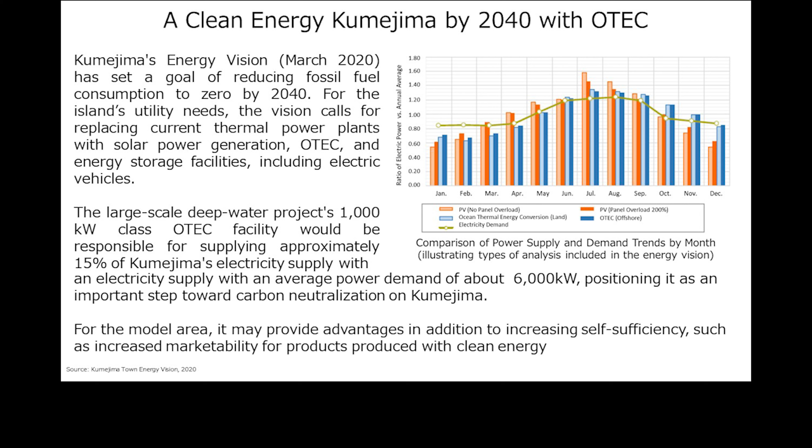As you can see in the graph on the right, the types of analysis included in this vision also consider OTEC. For the model area, OTEC may provide advantages in addition to increasing self-sufficiency, such as increased marketability for products produced with clean energy.

As a step towards increasing clean energy on the island, which is currently about 5%, and has been inhibited by the islanded grid capacity for intermittent energy sources, Kumejima Town has applied for a project which will enable installation of solar photovoltaic panels and storage batteries at the island's two junior high schools. The dramatic decrease in battery cost has provided an opportunity for the island to increase clean energy while limiting the disruptive element to the local grid.

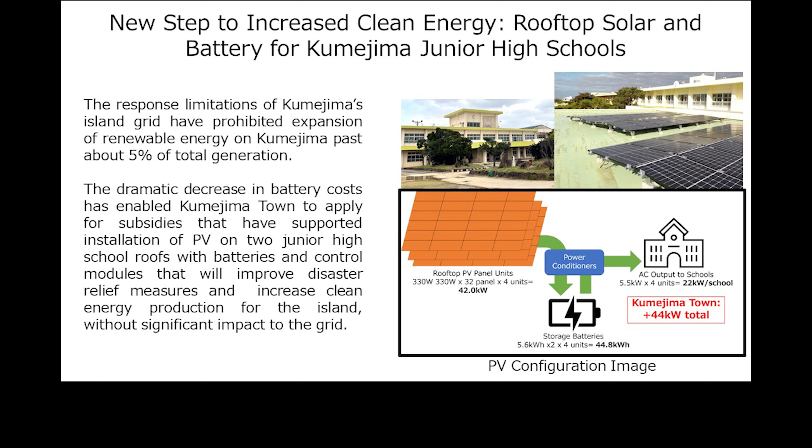The project plan calls for 42 kilowatts of panels, with 44.8 kilowatt hours of storage. The setup will also improve disaster response by providing small-scale power during outages or disaster situations. This project will bring a total of 44 kilowatts of renewable energy to Kumejima Town.

To provide a better understanding of why Kumejima is developing a model area, we would like to provide background on the current situation in Japan and Kumejima. Currently in Japan, there are 15 sites utilizing deep ocean water, or DOW, from Hokkaido in the north to Kumejima in the south. Each facility has its own focus, but overall, Japan has expertise in utilizing many aspects of the DOW resource.

DOW is water found below 200 meters, a depth below where sunlight permeates. This, as well as other ocean mechanics, provide DOW with properties different from surface seawater, namely low temperature, such as about 4 degrees Celsius, colder than some refrigerators; cleanliness, very little bacteria can survive cold temperatures, and the natural thermocline helps keep human pollution away; and nutrients. Naturally occurring nutrients are normally consumed by plankton in the surface area, but remain in the deep water. The nutrients can be used like fertilizer in aquaculture.

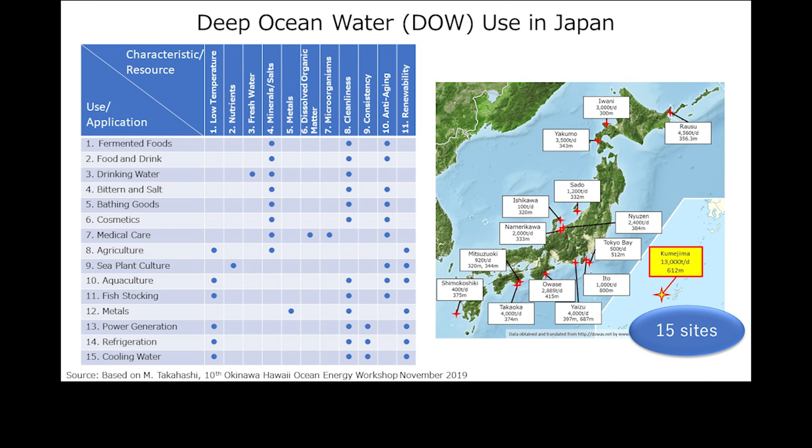Okinawa's Deep Ocean Water Research Center, ODRC, is located on Kumejima, and since 2000 has supplied up to 13,000 tons per day of surface and deep water for internal research and for use by private companies. The center was developed with a primary focus on fishery, with an intake depth of 612 meters for deep water and 15 meters for surface. The ODRC develops technologies based on DOW properties to support industrial growth. A separate department in Okinawa Prefecture's government also established the Okinawa OTEC Demonstration Facility in 2013.

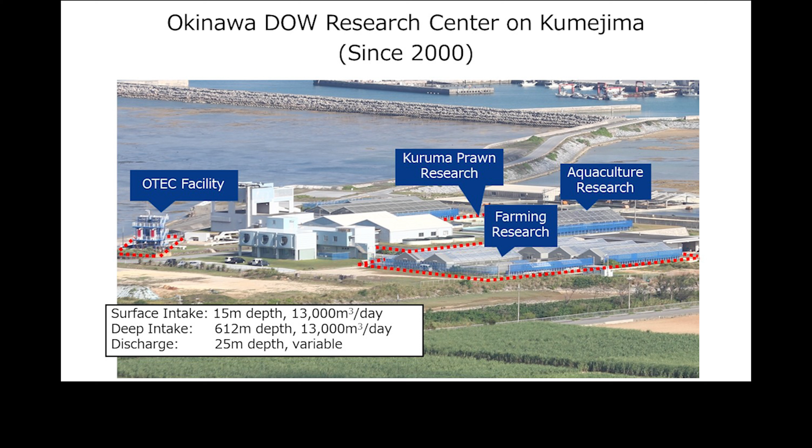In Kumejima, the majority of water is used by fishery, specifically sea grapes and kuruma prawns. Prawns are developed at a hatchery before grow out in large-scale ponds. In Kumejima, these prawns are highly prized, but were originally wild-caught. However, the trend, which is reflected in other industries, is towards farmed prawns. Deep ocean water provides a resource for stabilizing supply, improved profitability, and reduced risk.

In particular, the hatchery on Kumejima supports farms throughout the prefecture, enabling a stable and important industry for the entire prefecture. On Kumejima, local companies buy water from the ODRC and use it as a resource to create their products. As with the overall trend, the largest industrial use is for kuruma prawns, which with sea grapes now have the largest market share in Japan.

In addition, the local cosmetics company Point Pure continues to grow as it produces its own brand and OEM cosmetics such as shampoos, moisturizers, and cleansers. Together, these industries provide roughly 2.5 billion yen in annual revenue, supporting more than 300 jobs and industries not just on the island, but throughout Okinawa. In addition to producing products for local consumption, it also allows for exports.

To give an idea of scale, Kumejima's total agriculture output is about 2 billion yen per year, so DOW industries have become one of the largest single industries for the island. Here's a quick look at some of the deep-sea water industries on Kumejima.

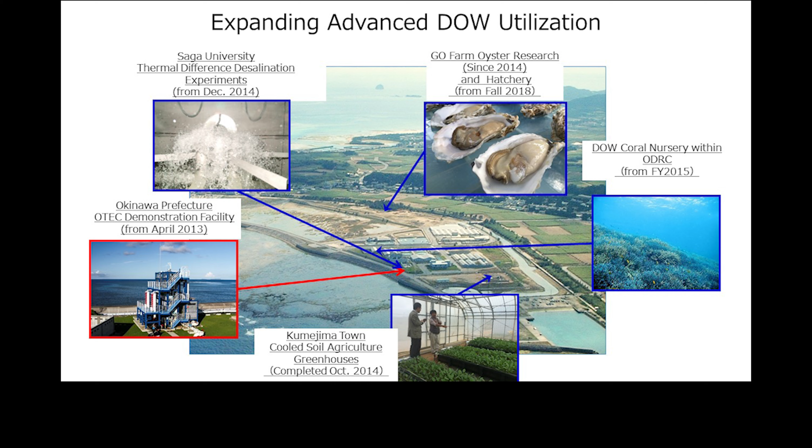The Okinawa OTEC demonstration facility, established in 2013, uses the temperature difference between surface and deep water to produce clean electricity. This is achieved in a Rankine cycle, which uses a low boiling point working fluid. For this facility, R134A, a refrigerant commonly used in air conditioners and refrigerators, is heated in a plate heat exchanger by the surface ocean water.

Once warmed, it vaporizes. The vapor expands and a turbine spins. The turbine drives a generator which then produces electricity. The gas leaving the turbine is cooled back into a liquid in a second heat exchanger, where deep ocean water provides the cold energy. This process can operate continuously, allowing for nearly 24/7 power generation. Okinawa's demonstration facility is 100 kilowatt, about the scale needed for 250 households.

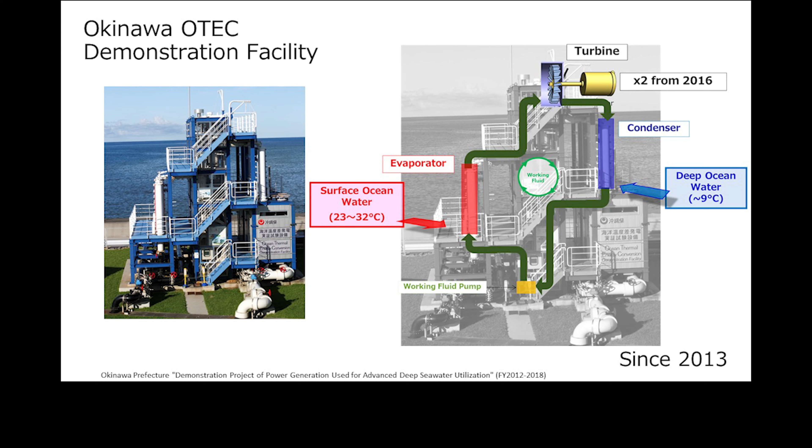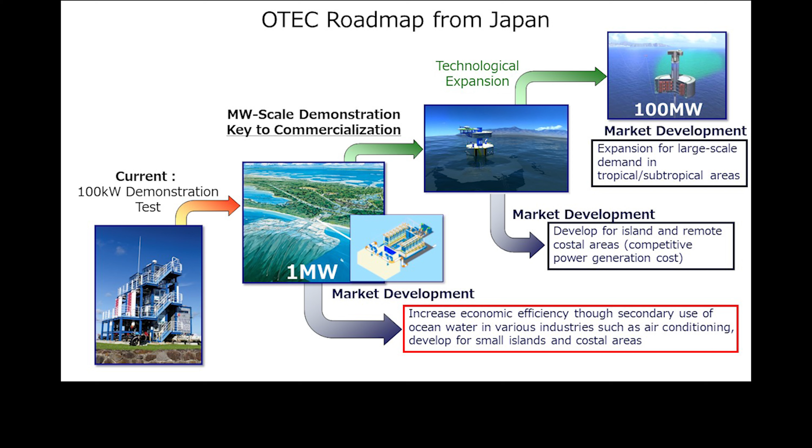In Japan, our future goal for OTEC is a large-scale offshore facility. To reach that goal, developers consider the next step to be a megawatt-scale onshore OTEC facility. To establish this facility, expanded ocean water capacity is required, which matches well with the local fishery and other industries' demand for more ocean water.

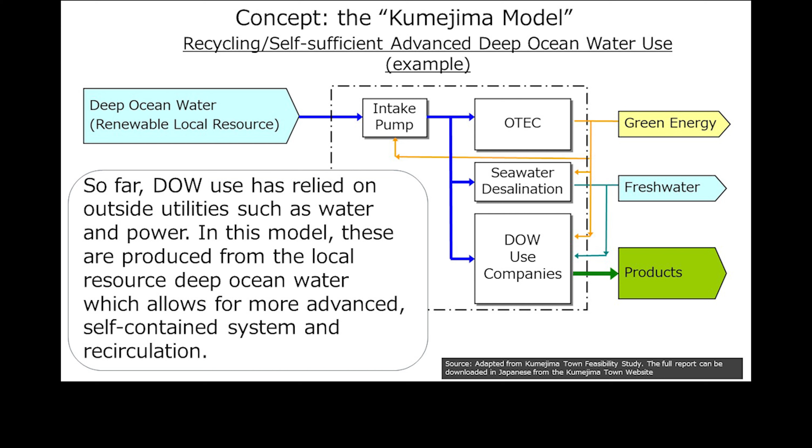Recognizing the need for expanded ocean water capacity for both DOW industries and OTEC, the feasibility study conducted in 2010 proposed the Kumejima model. The Kumejima model is a concept for adapting current DOW use into an advanced, self-sufficient system. So far, local industries rely on island utilities for water and power. However, the model calls for a more advanced, self-contained system that would allow for multiple use of the DOW resource while also supplying energy and water needs to industries.

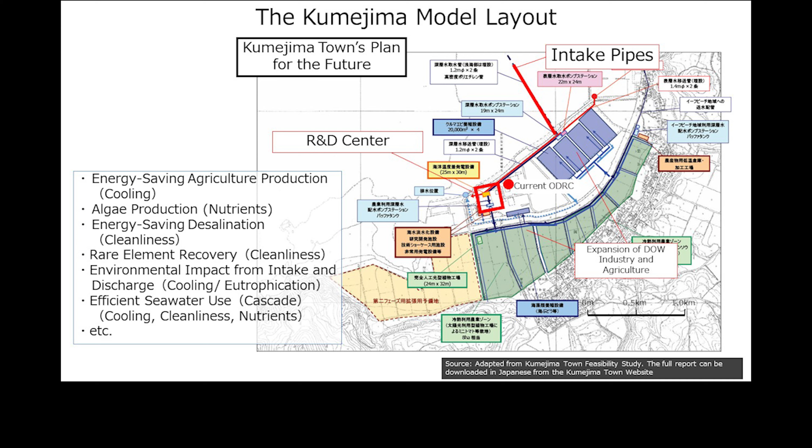The current ODRC is located in the northeast of Kumejima, with several local industries nearby. There are, however, areas available for expansion, such as the blue area for fishery and green for agriculture. New large-scale intake would provide resources for expanded agriculture, aquaculture, and other DOW use industries.

Okinawa Prefecture in 2016 promoted the start of multiple use of DOW by connecting the OTEC demonstration's ocean water to local industries. This provided useful understanding of the needs, challenges, and know-how for post-OTEC cascade use. As an example, in the case of sea grapes, they mix surface and deep sea water to maintain a desired temperature. However, in the warm summer months, post-OTEC surface water provides the correct temperature, allowing for reduced DOW consumption.

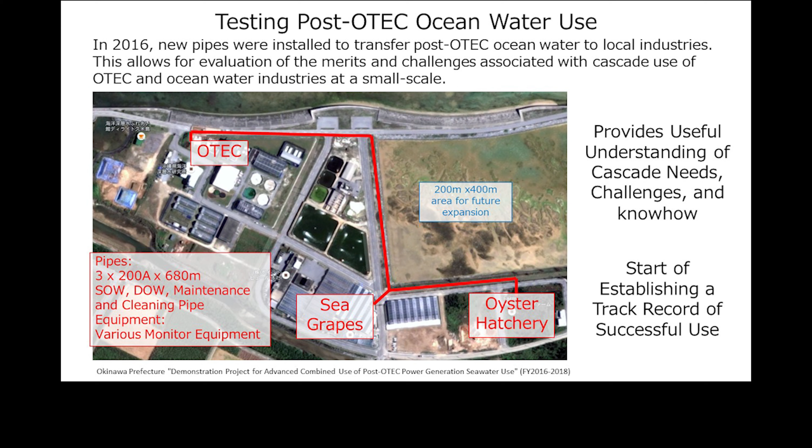In 2017, an economic survey was carried out to consider the costs and benefits from expanded ocean water intake, focusing on fishery. OTEC's costs and benefits were excluded from the analysis, and intake distribution and OTEC will be developed in parallel but separate projects. The results of the study were positive, with a benefit-to-cost ratio over the study's scope of more than 2. We would expect OTEC to improve this further.

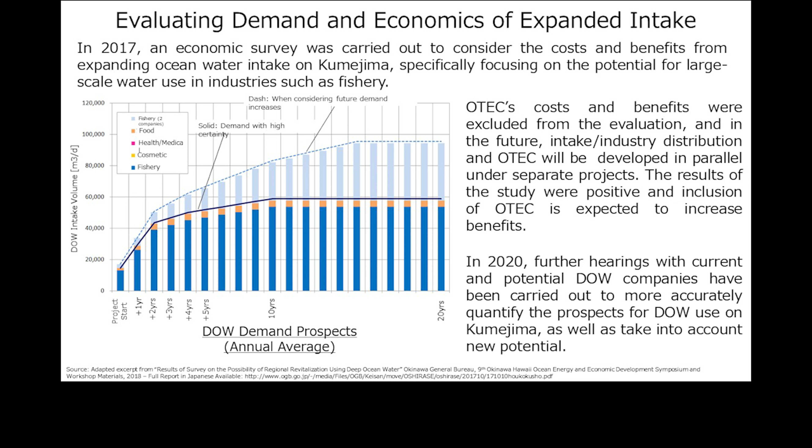In fiscal year 2020, further hearings have been carried out to more accurately quantify the potential for water use in industries, as well as take into account new potential uses and users. The next step towards expanded intake is a detailed site survey planned for fiscal year 2021 to 2022. Although the general area for expanded use is generally defined, detailed survey of land and sea are necessary to determine intake positioning and design, which will have a large effect on the overall project. This survey is planned to begin April 2021.

The outcome of this work will be a detailed plan for the establishment of the Kumejima model and act as a precursor to necessary environmental impact assessment, detailed design, and construction of water intake and distribution lines.